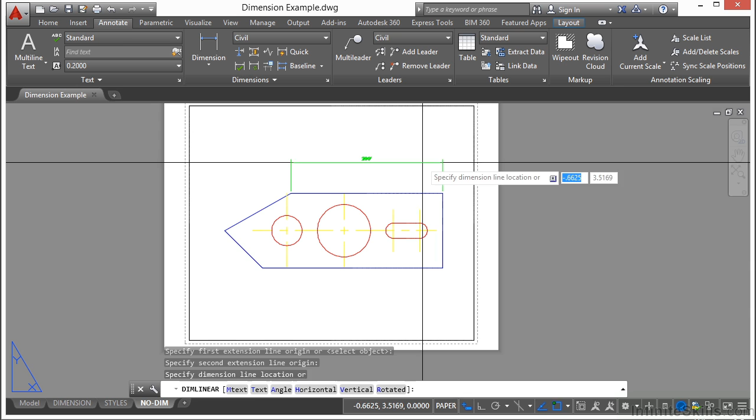So right now with it set to 2, if I draw a dimension here, any type of dimension, and then I go to select it, you see it's a dimension object. If I open up my properties palette and I select it, it tells me it's a rotated dimension. That's the type of dimension it is.

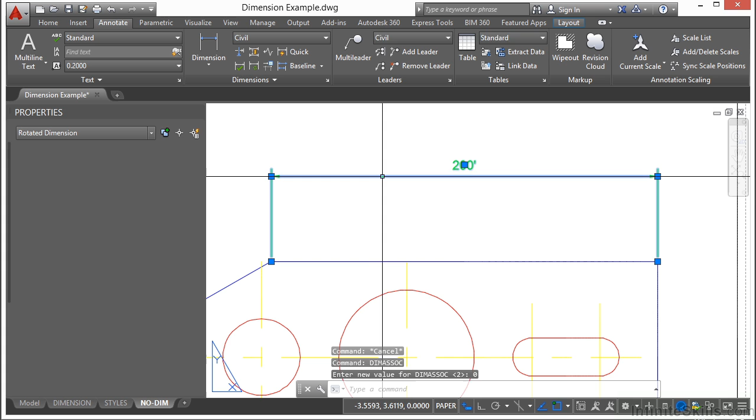Now, if I go to my DIMASSOC value and I turn it to 0, of course, this dimension will stay the same. It was already drawn in. But if I create a new dimension, I get a lot more options. This is the very old setting for dimensions that we used to use before associative dimensions. But it's still here. It's a legacy command. And when you go to use it, it asks for a lot more information, like the value.

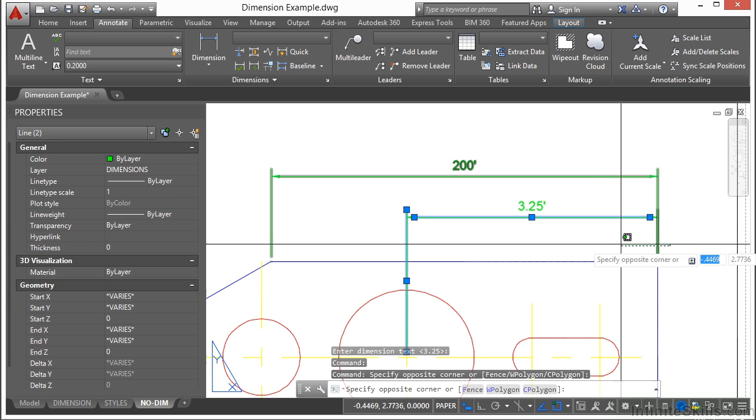Once you type it in, you can see here, this is not a dimension. This is just a series of lines. It's also a text object. And we have an arrowhead here that is really just a solid. So I can't easily change or edit it like I can here. You don't want to use this unless there's something absolutely strange about your dimension that you can't get to work right. So that's what that setting does.

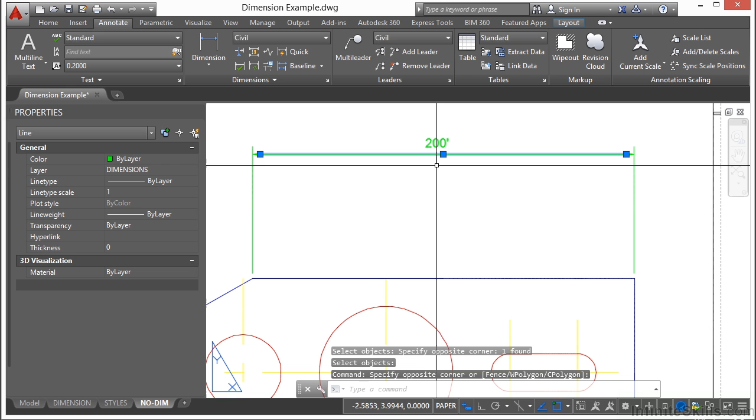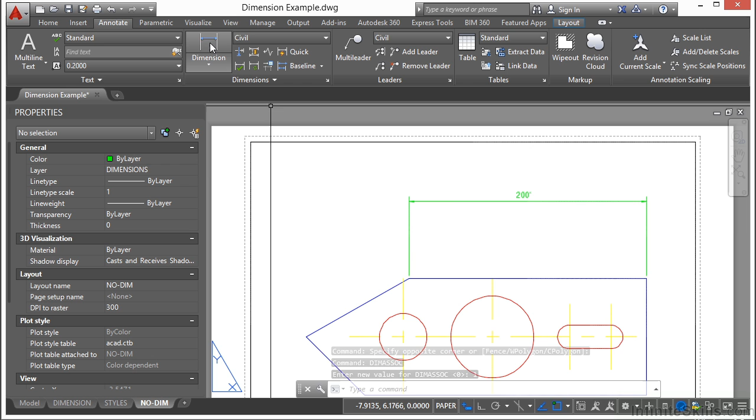Now, if you explode a dimension, that's kind of the same result. It just turns it into a bunch of lines, text, and solids. Now, there's a difference between setting 1 and setting 2. A lot of times you'll find older files set to number 1. Number 1 turns them back into a dimension object. So now when I create this dimension and select it, it's a dimension object, same as if I select the old one. I'm going to erase these to get them out of the way.

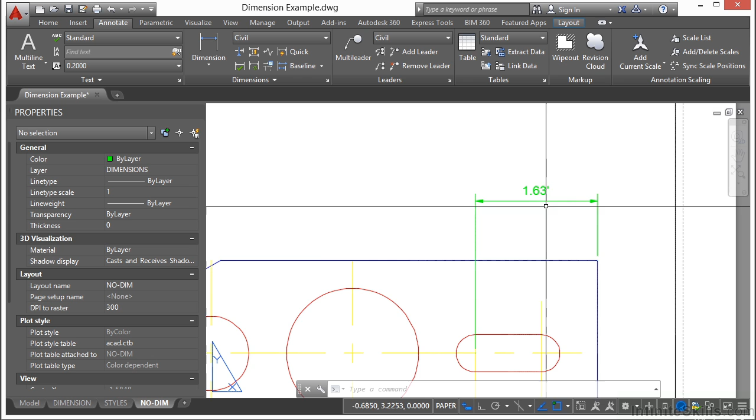But this is a setting where you need to manually set your scale. As you can see here, this dimension is 1.63 units. If I set my DIMASSOC setting to 2, and I dimension the exact same spot, you'll see I'm getting a different value. Setting 2 associates your dimension insert points to the object in model space that you pick while you're dimensioning in paper space. Setting 1 doesn't do that.

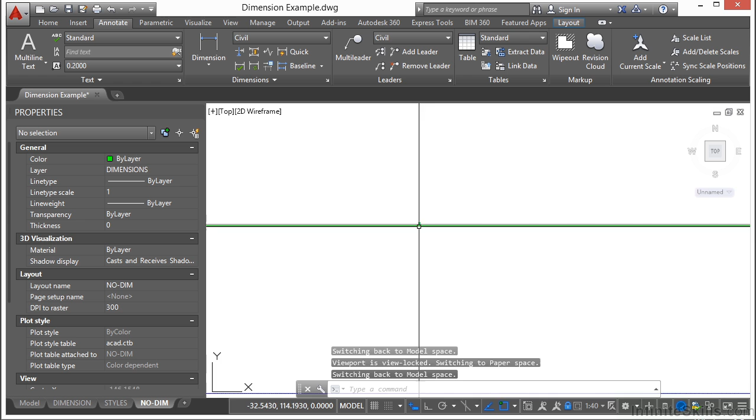It takes the absolute true length of what you're actually measuring in whatever space you're in, be it model or paper space. So if I double click inside this viewport to activate it, change my DIMASSOC setting to 1, and dimension this: first of all, my dimension is not to scale, so it's not showing up right. But as I zoom in, I get the proper length, 65 feet. Same as in here. Setting 2 allows you to work in paper space. It measures the true distance involved, not the viewport scaling. That means you can make one dimension style regardless of the scales used.

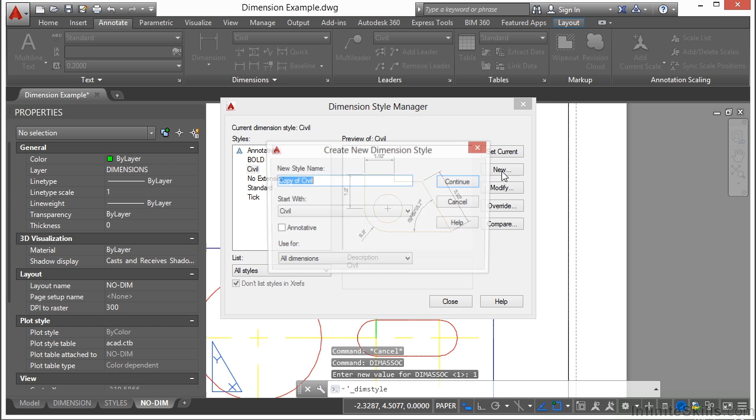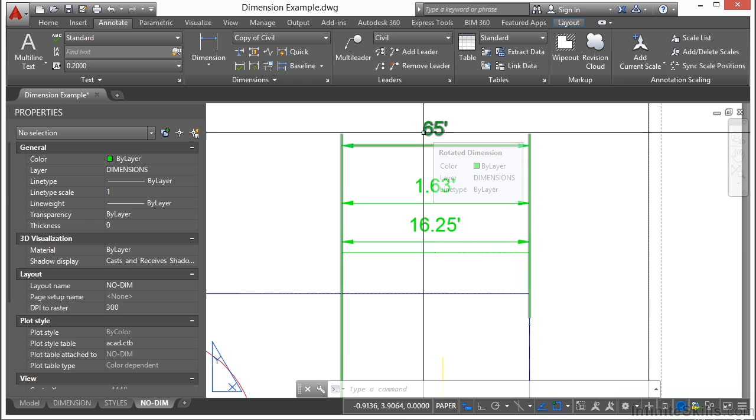So if I'm using the DIMASSOC setting of 1, in order for this to scale properly, I have to go into my Style Manager and set up the scale of my drawing right here. So if I change this to a scale factor of 10, set that one current, and make a dimension here, it scales up the value that it's measuring by a factor of 10. So you can see here, this is 1 to 1, this is 1 to 10, and this is a true value based on the viewport scale.

Setting 2 is easier because if I have multiple viewports at different scales, which you will often do, especially on architectural or mechanical drawings, then I don't have to set that up. I can just go with it. Also, the setting of 2 works everywhere. It works in paper space and in model space. Some people prefer to dimension in model space, some in paper space, and sometimes you may need to do both. I don't suggest that, but sometimes it happens. Setting it to 2 means there's less work for you to do.

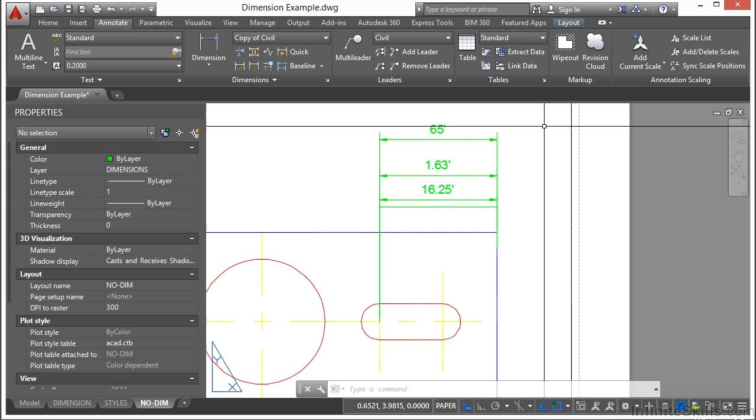The settings of 0 and 1 are legacy settings that are still there because Autodesk never gets rid of old commands or system variables. They bury them deep in there, but they keep them in, and you might come across them from time to time, but just set it to 2 and everything will work fine. So if you get a drawing from somebody and it's not measuring properly when you do your dimensions, check that setting. Also check the scale factor in the dimension styles, see if that's doing something crazy, and keep an eye on that if it's not looking right.